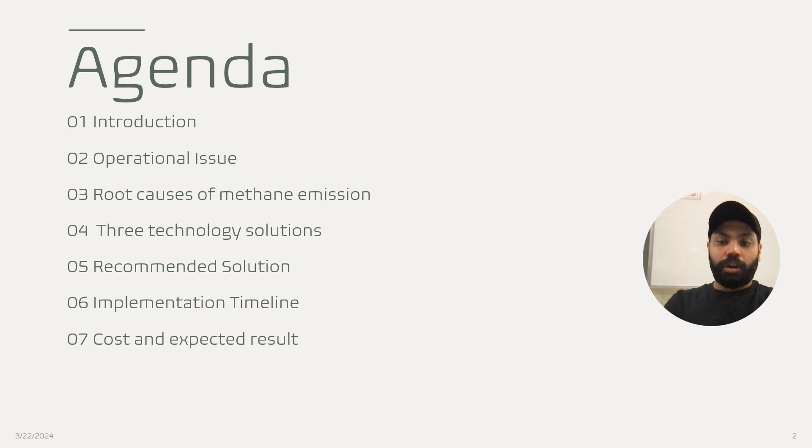Our today's agenda is methane emission by Syncrude. We will start with introduction, operational issues of Syncrude, root cause of methane emission, three technology solutions for methane reduction, the one recommended solution for them, the implementation timeline, cost and expected results, benefits and ROI, and a conclusion. Introduction will be given by Manpreet.

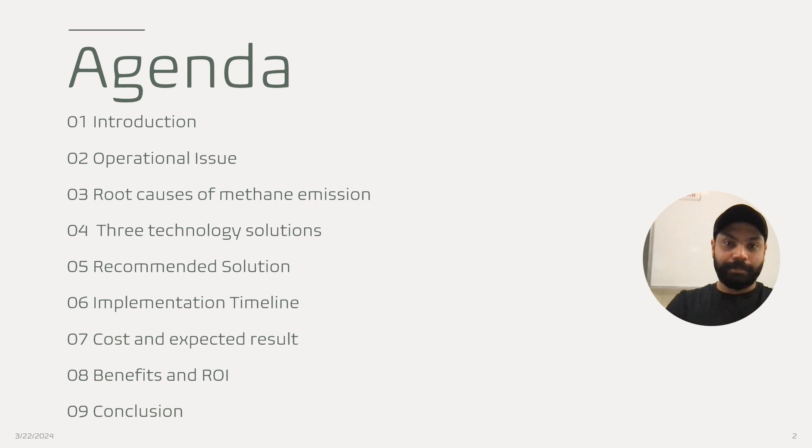Good morning, Professor. I'm going to introduce Syncrude, which is a major player in Canada's oil sand industry, based in Alberta. Syncrude is a joint venture between Suncor Energy and ExxonMobil. The company is dedicated to bitumen extraction and processing, mainly aiming to produce synthetic crude oil, along with balancing economic interests with environmental responsibility.

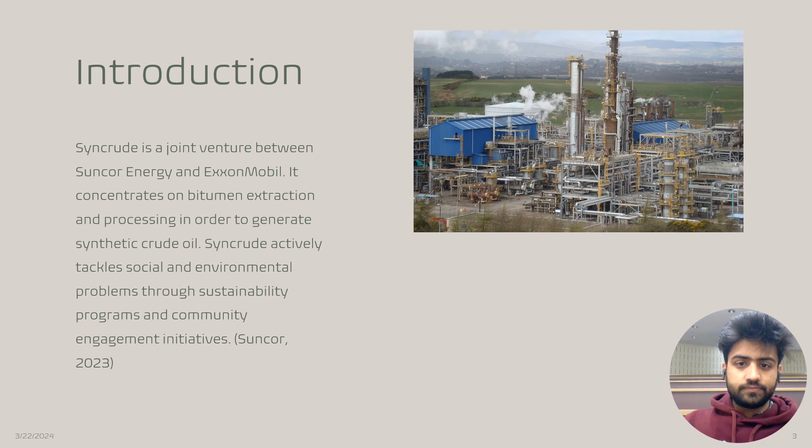Now coming to the operational issue, our operational issue is the release of methane as a part of normal operation. It is one of the major issues that any oil company in the world is facing right now, as methane has great potential of causing greenhouse effect over other gases.

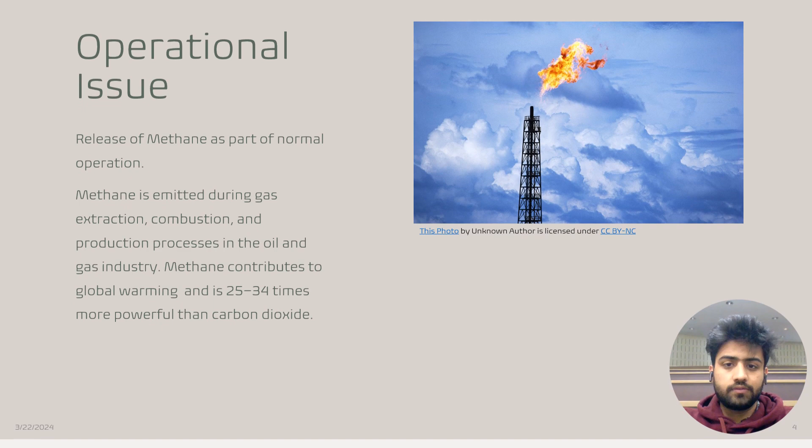As we delve into the operational methods of the oil and gas industry, we encounter various fundamental causes of methane emission. These include escaped emissions, intentional flaring and venting, absence of control and monitoring, technological restrictions, and industry customs.

First is escaped emissions. These occur during various stages of oil and gas production, including extraction and distribution processes, when methane is released into the atmosphere due to leaks, malfunctions, or inefficiencies in equipment, infrastructure, and operational practices. One significant source is fugitive emission, which occurs when methane leaks from equipment, pipelines, valves, and other components used in oil and gas operations. These leaks can result from inadequate maintenance, aging infrastructure, equipment malfunction, or improper installation.

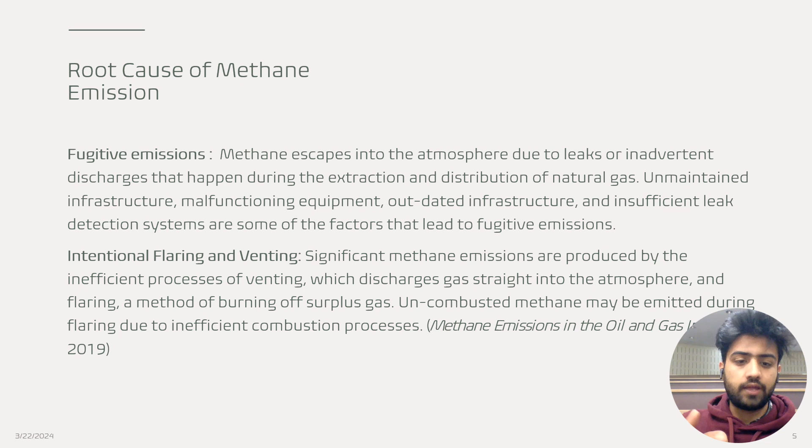Next is flaring and venting. Flaring involves the burning of excess gas in a controlled manner, done during routine operations, equipment maintenance, or emergency situations to prevent the buildup of pressure in oil wells or processing facilities. On the other hand, venting involves the direct release of gas into the atmosphere without burning it. This process is typically used when it's not feasible or cost effective to capture and utilize the gas for other purposes.

Our third point is technological restrictions. This refers to the limitations or challenges associated with existing technologies for detecting, monitoring, and mitigating methane leaks and emissions throughout the oil production and distribution processes. Reliance on traditional leak detection methods that may be outdated or insufficient in accurately identifying methane leaks is a primary restriction. Methods such as manual inspections or handheld gas detectors may have limitations in terms of coverage, sensitivity, and reliability, leading to undetected leaks and inaccurate emission reporting.

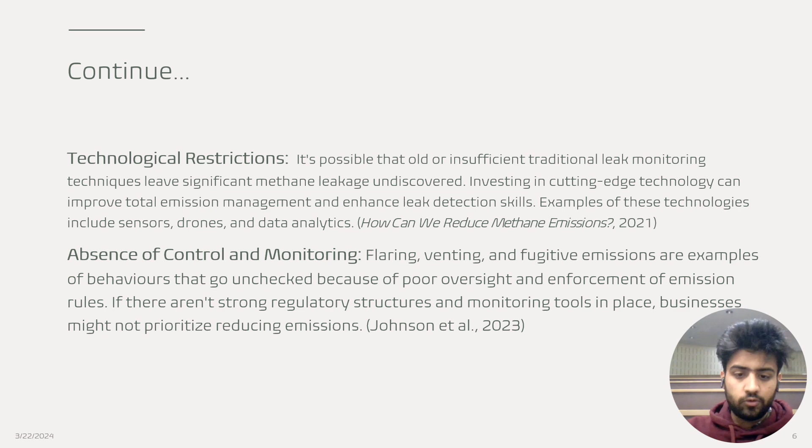Apart from this, the fourth point is the absence of control and monitoring. One of the main challenges is the absence of a strict regulatory framework and enforcement mechanisms to ensure compliance with methane emission reduction targets and set standards. Without clear guidelines and penalties for non-compliance, companies may prioritize cost-cutting measures over investing in emission reduction technologies and practices.

Hello. As Manpreet came up with some root causes of the methane leaks, we came up with three solutions: unmanned aerial vehicles, IoT sensors, and software for methane quantification and detection.

I'll start with UAVs, unmanned aerial vehicles. These are drones fitted with sensors that check the emission of methane into the environment. Drones are able to gather data on the sources of pollution in real time, as well as being efficient in covering big areas, so we get a large amount of data covering a wider range.

Moving to IoT sensors, these are equipment equipped with sensors that allow real-time monitoring of methane levels. These sensors gather data and wirelessly transfer it for analysis, facilitating data-driven choices for reduction initiatives, enhancing safety protocols, and optimizing maintenance plans. It will help us detect early leaks of methane so that we can take actions accordingly.

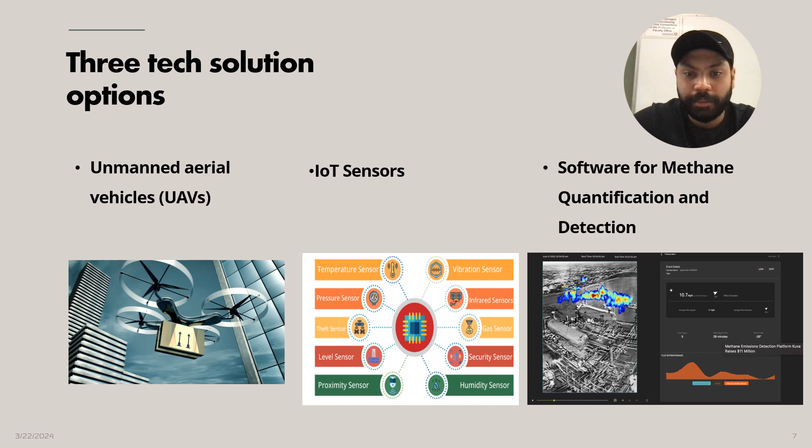Moving to software for methane quantification and detection. Methane emissions from Syncrude activities are identified, measured, and shown using sophisticated algorithms in data analytics based methane detection and quantification software. To provide a picture of methane emission, this software integrates with the current monitoring system to evaluate data from a variety of sources such as detectors, drones, and satellite images, helping us gather data and work accordingly.

So here we come up with the solution that we recommend for Syncrude: installing IoT sensors in the company. This will help us monitor the real-time data of methane emissions in the facility. This constant surveillance ensures that any changes in methane concentration are promptly detected, allowing for immediate action to be taken.

Second, data transmission. The sensors will collect data and transfer it for analysis, and the rapid transmission of data enables timely decision making based on up to date information about methane levels, helping us act accordingly.

Immediate input on gas level. One of the primary applications of the sensors is to provide immediate input on methane level by alerting facility operators to work on it. It will help us to change the methane concentration as they occur. These sensors enable proactive response, with a very low amount of errors.

Detection of leaks. IoT sensors aid in the early detection of methane leaks by continuously monitoring the methane levels. These sensors can detect leaks as soon as they occur in the facility, allowing immediate action to be taken, and repairs can be made before the leaks worsen.

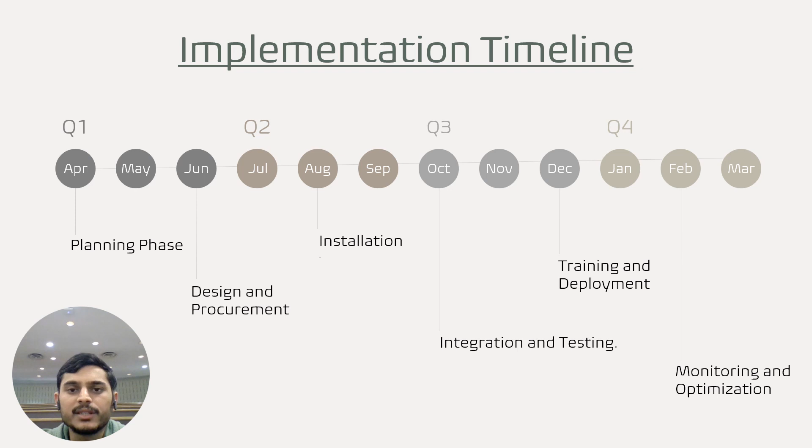So at Syncrude, we are making a smart investment in safety with IoT sensors. We are looking at an initial investment of 130K to 150K dollars, covering sensor procurement, installation, software development, and integration.

Once installed, we will spend around 20K dollars each year on maintenance and calibration to keep the sensors accurate and reliable. These sensors will help us detect methane leaks faster, making our workplace safer and saving us money in the long run by minimizing downtime and potential hazards.

In short, it's a small investment now for big safety benefits and long-term savings. So our expected result is less methane emissions, meaning a safer workplace and compliance with regulations. Also, smart monitoring leads to quicker leak detection, minimizing downtime and potential hazards.

Data-driven decisions help optimize maintenance schedules, saving cost in the long run. In short, investing now means safer operations, fewer disruptions, and long-term savings.

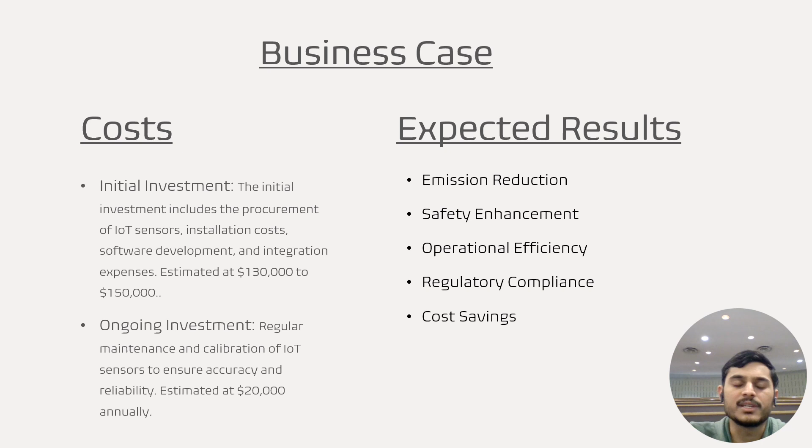So beyond just monitoring methane levels, these sensors offer numerous benefits. First is improved reputation. By taking a proactive stance on environmental management, we are not just meeting regulations, we are setting standards for responsibility and industry leadership. Second is future proofing.

Our investment in IoT sensor technology isn't just for today's regulations, it's preparing us for whatever the future holds. As regulations evolve, we will be ahead of the curve.

And the last is data insights. The data collected from these sensors isn't just for compliance, it's a treasure trove of information that can drive continuous improvement in our operations. And when it comes to ROI, the benefits are clear.

We are mitigating risks and protecting our assets by detecting methane leaks early, potentially saving us from costly accidents and repairs. Compliance isn't just about avoiding fines, it's about maintaining our reputation and competitive edge. And let's not forget the cost savings: decreased downtime, lower maintenance expenses, and a more efficient operation overall.